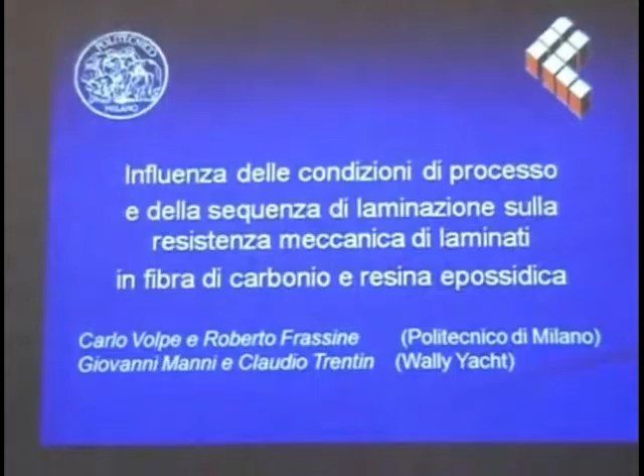We're dealing with processing conditions and lamination sequence on the fracture resistance of laminates. This is the scope of the analysis, based on the fact that most sailing boats, especially racing sailing boats, are of big dimensions. You may see one of these dimensions in the picture.

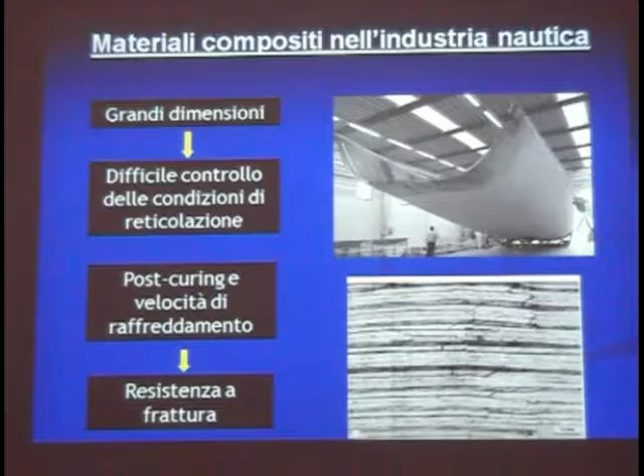It's very difficult to control accurately the processing conditions for composites made of thermoset resins. We have been studying the post-curing and cooling rate effects on the fracture resistance of laminates made of continuous unidirectional fibers and an epoxy resin matrix.

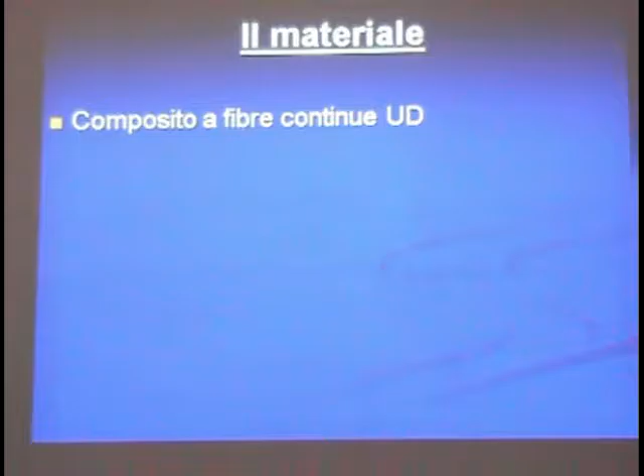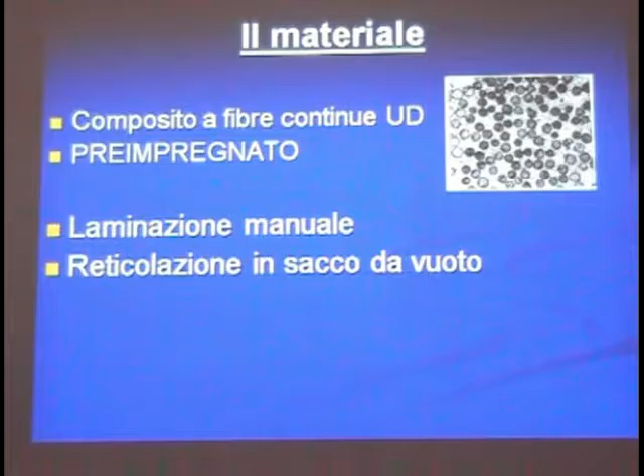This is a so-called pre-preg, in which the resin is already present together with the fiber. Samples have been stacked up using a manual lamination procedure, and then the material has been cured in a vacuum bag arrangement, which is shown in the picture.

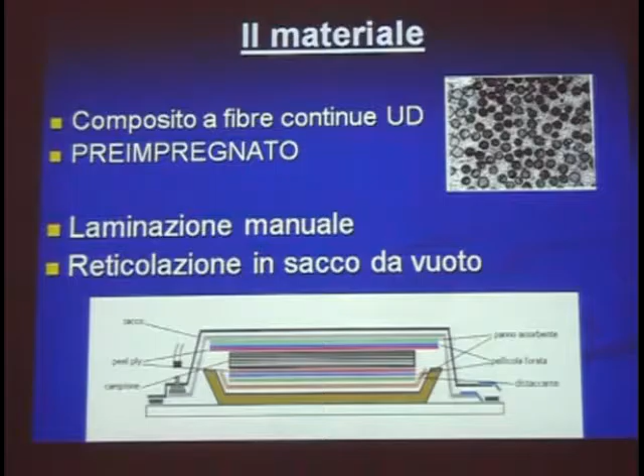I don't have time to go through all the components of this arrangement, but basically, what is important in order to get the correct properties of the material is to set correctly the temperature history and the vacuum inside the bag.

So the thermal cycle is used mainly to reach the right condition. This is a so-called TTT diagram, temperature-time-transformation diagram. You may see that the red line shows the curing cycle, which is composed of two steps.

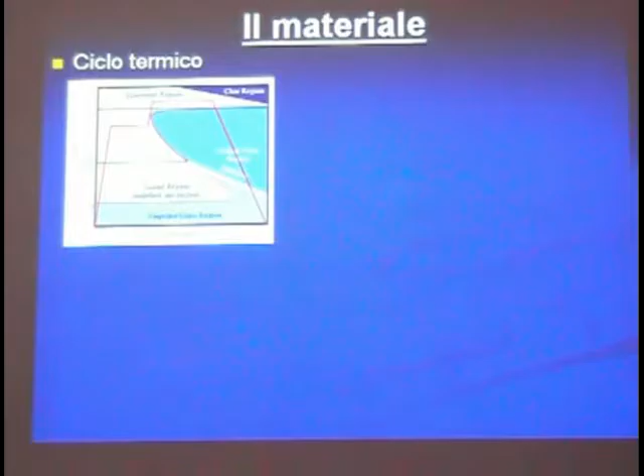One step at an intermediate temperature and one at a high temperature, in order to reach the gel glass region and get correct properties from the matrix. The basic scope is to get a glass transition temperature as high as possible from the polymer.

The processing parameters are many: the heating speed, the temperature at the two steps, the cooling rate, and the times t1 and t2 of each step.

Basically, the temperature controls the kinetics of the reaction, and then sets the level of the residual stresses that arise at the interface between fiber and matrix, and their possibility to relax during the cooling time. That's the reason why the cooling time is kept as long as possible.

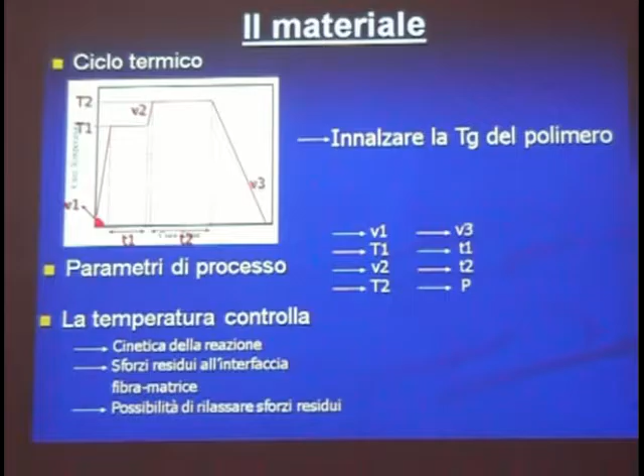So we have been studying the effect of the thermal cycle on compression-after-impact properties of the laminates. I will show how it works in a minute. We also studied the stacking sequence effect on the interlaminar fracture resistance of the material.

And then we have been comparing samples obtained in the laboratory with samples taken from a boat, in order to check the properties, especially the interlaminar shear resistance and the composition of the material.

This is the standard cycle that has been set. There is a cooling step, a heating rate up to 75 degrees Celsius, and then a second step at 90 degrees Celsius, followed by the cooling down.

The first part of the cycle before the cooling is 11 hours, and then the cooling takes place over 12 hours. So it's a total time of about 20 to 24 hours.

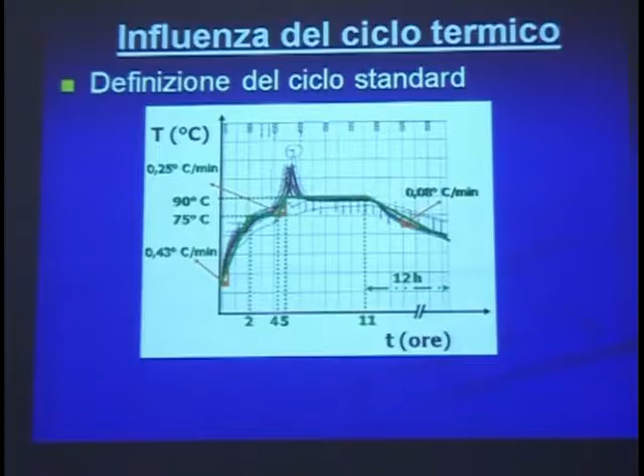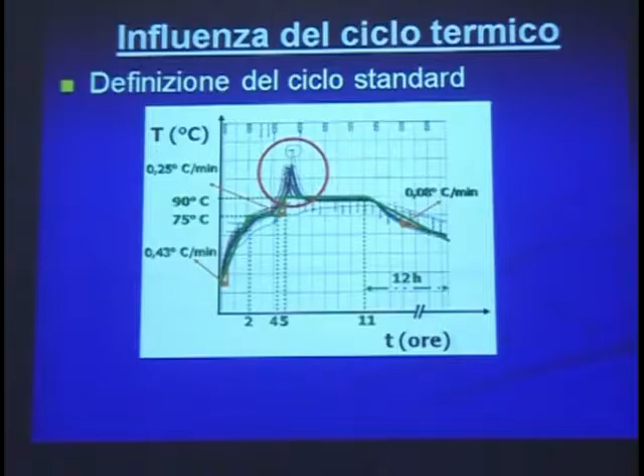This is a bundle of signals coming from the thermocouples placed on the hull of the boat in different places. You may see that there is quite a good correspondence between the real cycle time and the schematic cycle time, except for an exothermal peak that takes place in the early stages of the cross-linking of the resin.

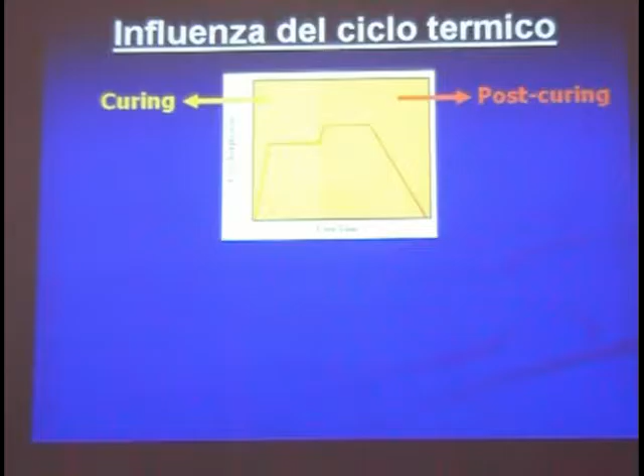So we may simplify the analysis by saying that the yellow part of the temperature cycle is the curing part, and the orange one is the post-curing part. We have been varying some parameters in the post-curing part, namely the cooling rate V3, and the time of the post-curing, which we call T2, the duration of the second step.

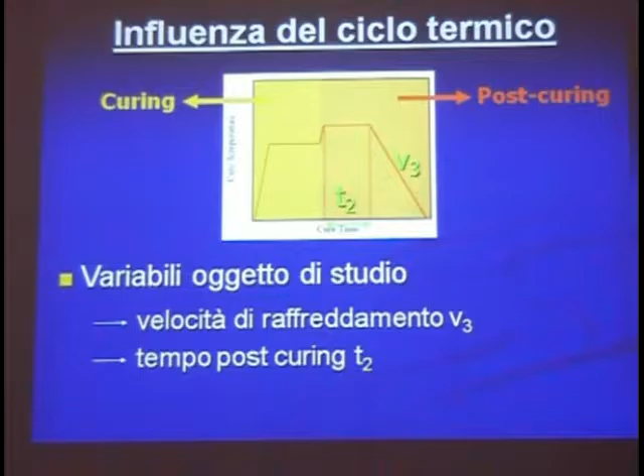Now let's look at what we have done with the cooling rate. The standard cycle uses a very low cooling rate. We have been trying to accelerate this part so as to save time for the curing cycle.

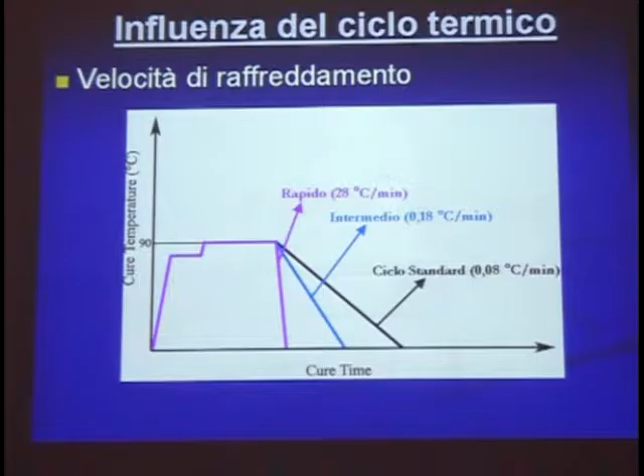So we tried an intermediate one and a very rapid one, a quenching, which is called the rapid cycle, at 28 degrees Celsius per minute - so a few minutes.

As for the post-curing time, we have been expanding the standard post-curing time, which is about 6 hours, to 12 hours and 18 hours.

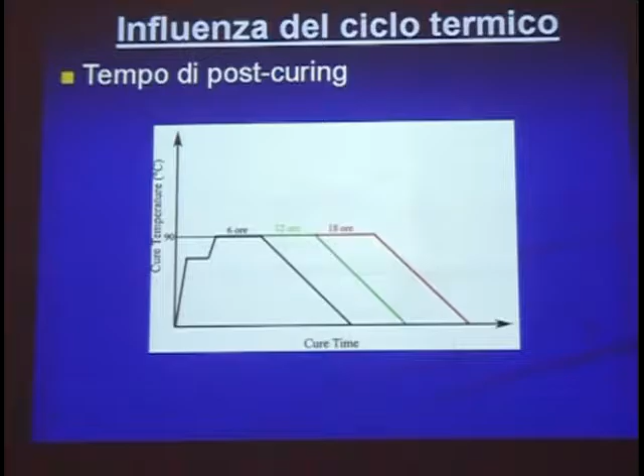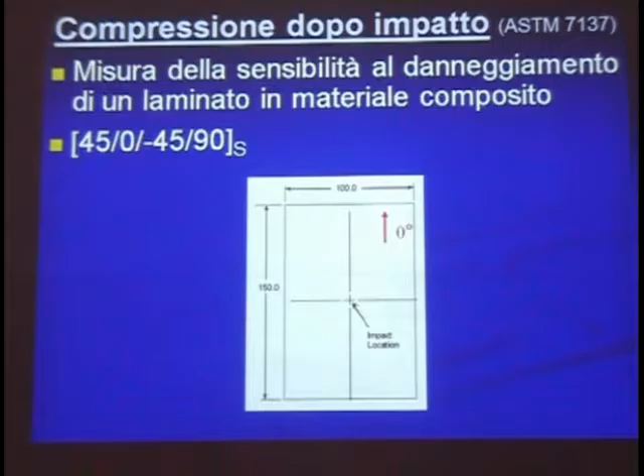This sample, with the quasi-isotropic stacking sequence, is tested in impact with an energy which is not sufficient to break it, but simply to damage it.

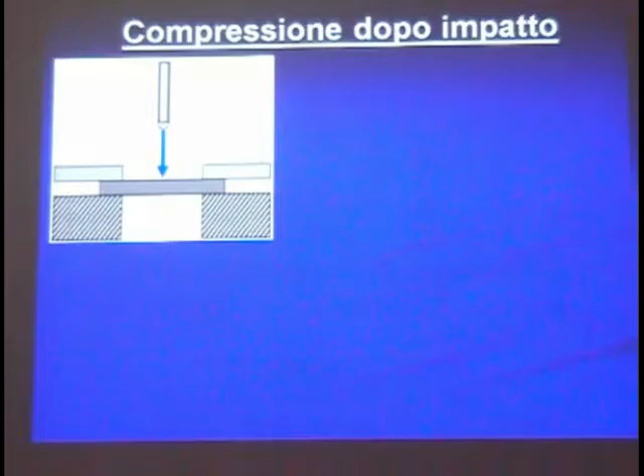So the striker rebounds, and then after the rebound, one can calculate the energy due to the impact.

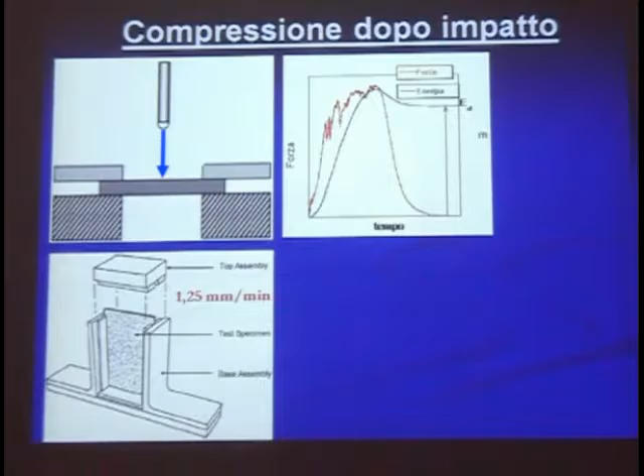And then we have been going through a compression test. This is a standard setup for composites. It has two rails in order to stabilize the specimen, and then the top assembly is used to apply the compression load. This is the typical load-displacement curve, and one takes the maximum force divided by the area to get the stress, the strength of the material after impact.

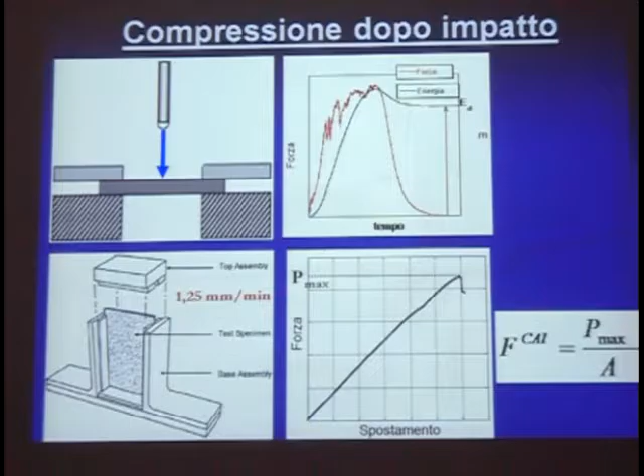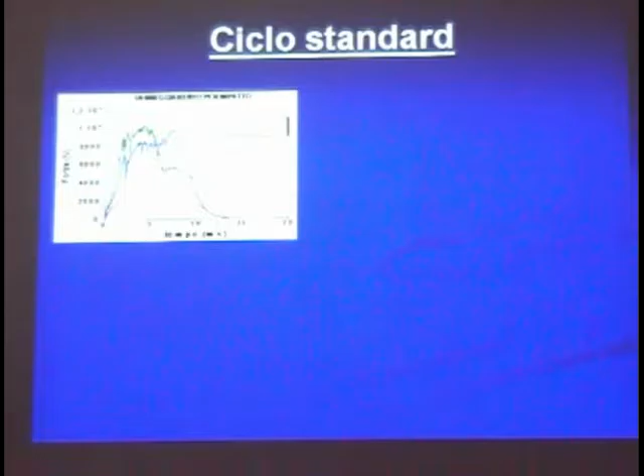This is a typical series of curves obtained from the impact, from the striker at varying impact energy. The red is at low energy. You see there is a rebound which is almost perfectly elastic, no damage, but as you increase the energy, some damage is apparent on the curves.

And it has a strong effect on the force displacement curve in compression. First, you get a very high strength, and then the strength is reduced, and then at a certain level of damage, the behavior changes completely. And in this case, the sample is badly damaged, although

not completely broken. And this results in the two-stage curve in the residual strength versus damage energy. You see, you have two stages clearly visible. For low energies, you get a slope which is higher than for high energies.

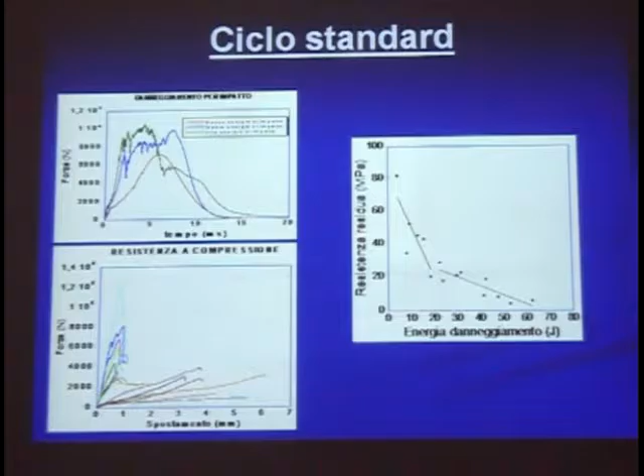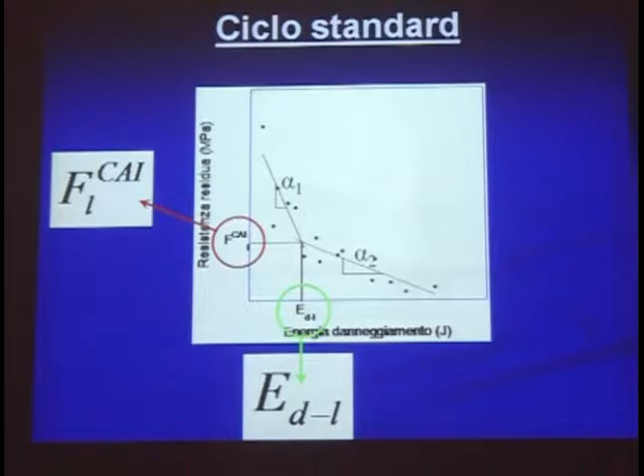So we decided to define some critical points on this bilinear plot. One is the critical strength at transition between one mechanism and the other, which is called FCAI. The second is the energy, the critical energy corresponding to the very same value of the critical strength, and then the slope of the second part of the curves, which gives you an idea of the ability of the material to withstand damage when the damage is already significant.

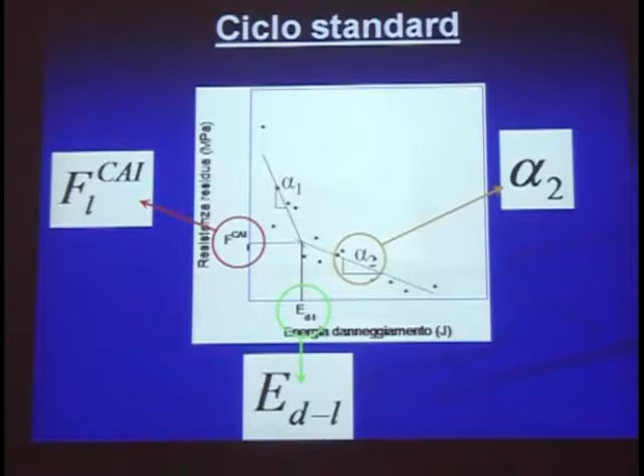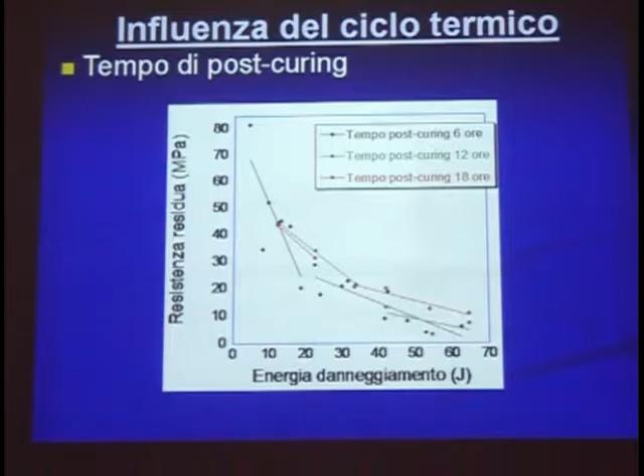These are the curves that we have been deriving for the post-curing time, 6 hours, 12 hours, 18 hours. You see there is a somewhat surprising upward behavior, which means probably that the standard 6-hour post-curing time is not optimal for this material.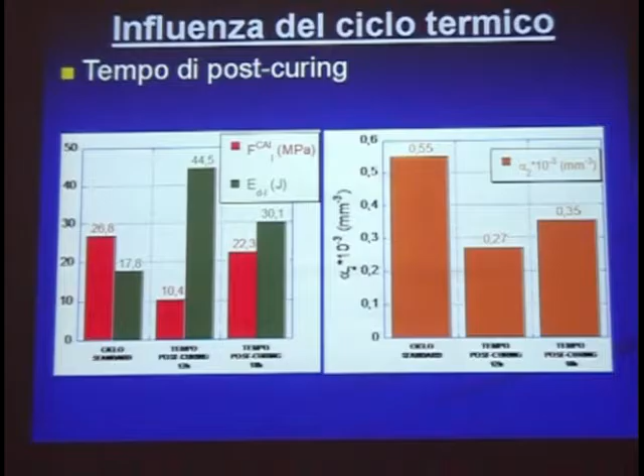The lower is the value of the slope, the higher is the ability of the material to withstand further damage for increasing impact at high energy. This is the more interesting, probably, condition, 12 hours post-curing time.

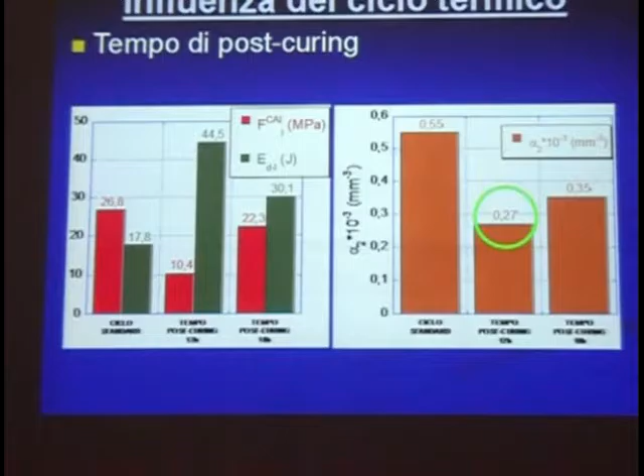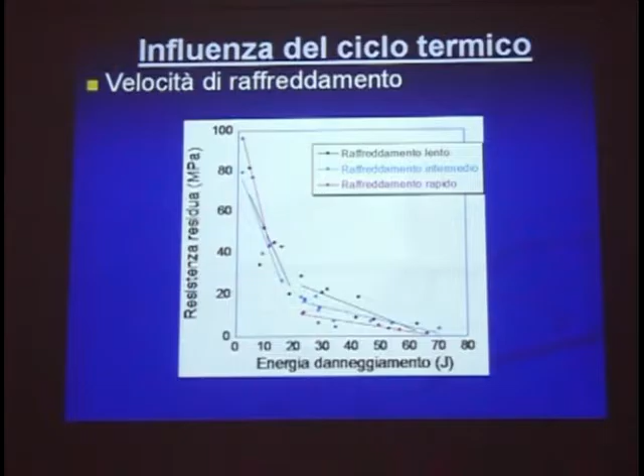And then here you have the summary of the parameters. So the critical strength decreases, while the critical energy stays about the same for increasing the cooling rate. And also the slope of the curve regularly decreases with increasing the cooling rate.

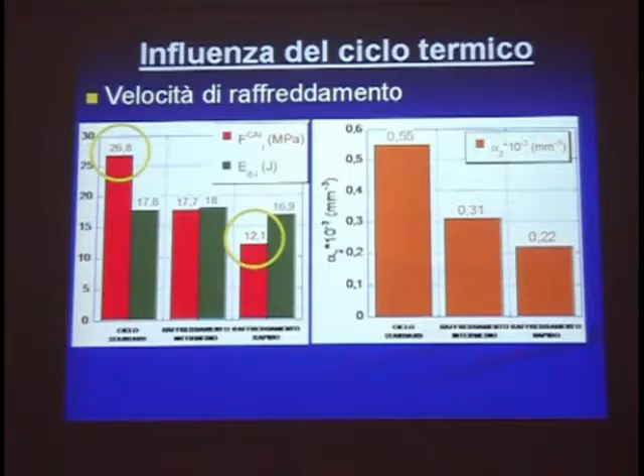I will go rapidly through this part. We have been studying delamination with using 3 lamination sequences. The quasi-isotropic already shown, and then sequence A, 0, 30, 90, minus 30, 0, and the sequence B, 7 layers at 0, then minus 30, 90, 30, and 0, which are 2 stacking sequences used in the boat hull at the bottom and at the flank of the boat.

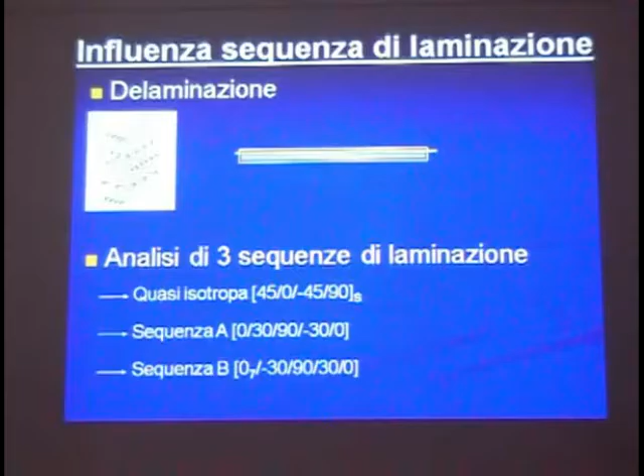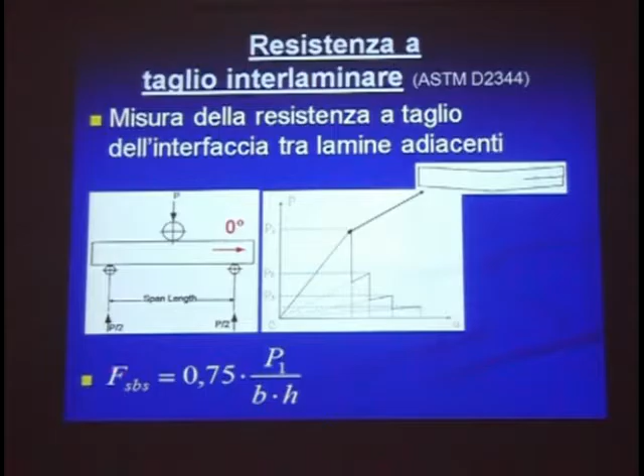We have been using the interlaminar shear strength test, which is basically a flexural test with a very short span in order to have very high shear inside the material. And this gives you delamination usually, and this is the formula that we have been using to calculate the strength based on the load and the sample dimensions.

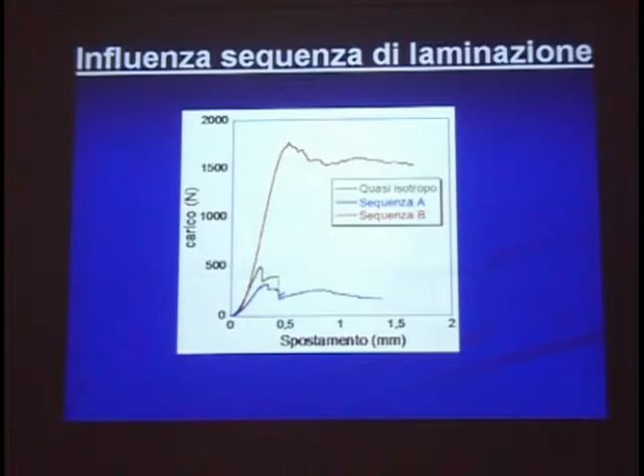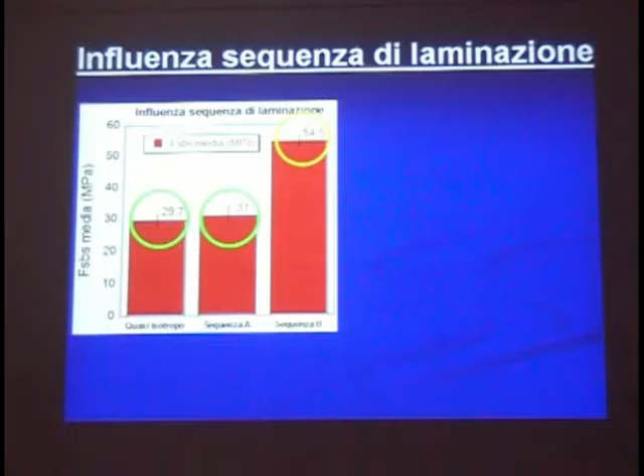You will see the sequence B, which has a lot of layers in the 0 degree, is quite stronger than the other 2 quasi-isotropic sequences, so much higher load and fracture energy, and this results in a much higher strength, delamination strength, first delamination strength for the sequence B. So the conclusion is that if you have more fibers in the 0 direction, of course your sample is more rigid, and then you get higher delamination resistance.

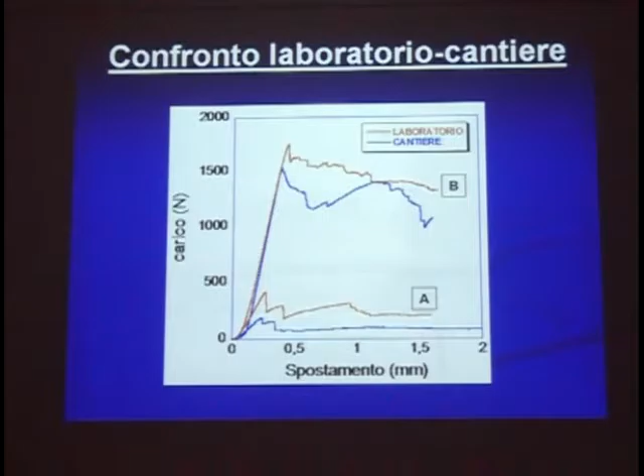And we have been comparing lamination sequences A and B from laboratory testing and taken from the shipyard. In the shipyard, you of course use different processing conditions because the hull is very big, so it's hard to control exactly in every part of the hull the temperature and the void degree. And then you get different curves from the laboratory plates.

Which is very interesting is that the samples taken from the hull showed a much lower strength, up to 50% less strength than the laboratory samples. So there is a significant downgrading of the material going from the laboratory to the shipyard.

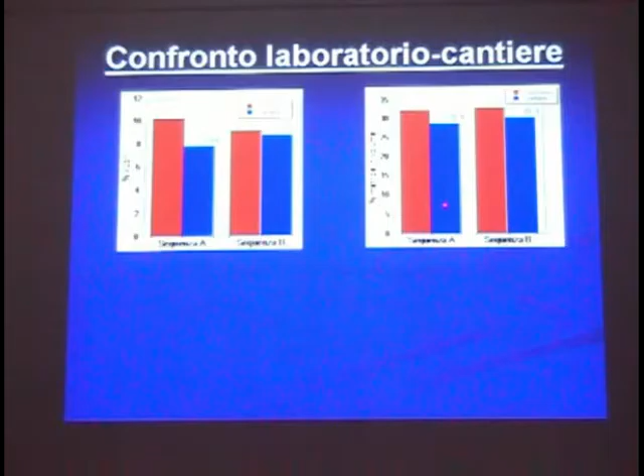And this is due, and this is the very last slide. And this is mainly due to the fact that although they have a considerable less void percentage, they also have considerably less matrix inside. So there is probably some lack of the matrix, which results in a reduction of the interlaminar fracture resistance.

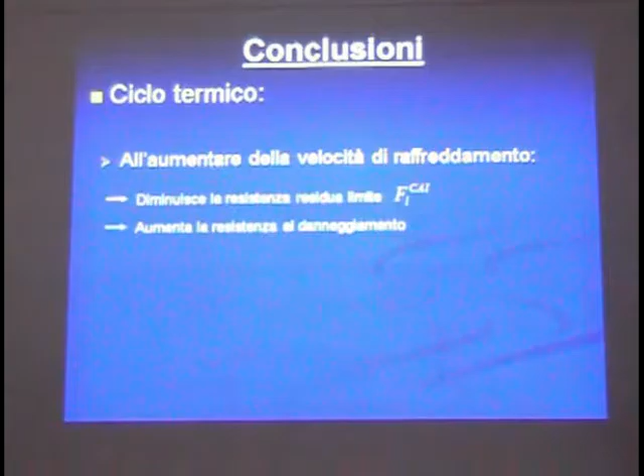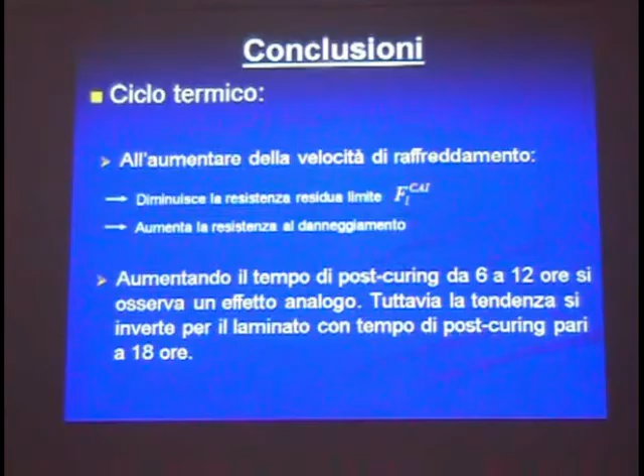So to summarize, if you increase the cooling rate during processing, you get a lower limiting stress, but you're more resistant to further damage increases in the samples. And if you increase the post-curing time, you get a same effect, although the picture is much less clear. And for the lamination sequence, the higher is the number of laminae oriented at 0 degrees, the higher is the fracture resistance. But difficulties in the control of the processing in the shipyard can result in significant differences in the material properties.